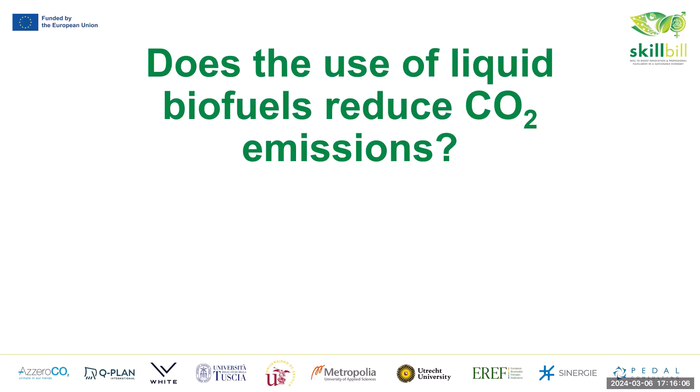The problem is more multidimensional and complex. So it's not only the primary emissions coming out from the tailpipe, but to get reliable answers, one needs to carry out life cycle assessments, environmental impact assessments, and such kind of calculations that take the bigger picture into account. So there aren't easy yes or no answers.

This table I took from one of the course materials, and it's quite a recent publication from early this year. And one advice is that if you want to understand it in depth, of course you would take a look at the original reference or the original publications where these conclusions or small details have been taken.

However, this is based on LCA, life cycle assessment calculations and evaluations, and bioethanol, biodiesel, biomass to liquid, biomethane, and also hydrogen results have been collected in this particular table. And what I wanted to visualize and emphasize with this material is that basically

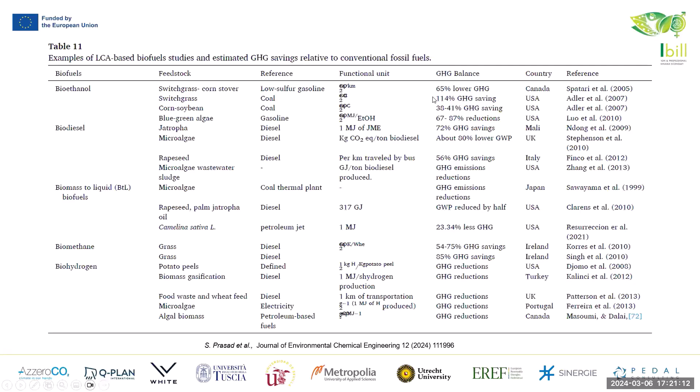But generally, first generation biofuels can also result, as mentioned in this slide, in lower greenhouse gas emissions, but with this, I want to just highlight that sustainability is much more than just greenhouse gas emissions and much more than only carbon dioxide emissions.

The advantage of these first generation biofuels is clearly that these are usually established and quite simple processes, and they don't require intensive pre-treatment of the biomass material. So these are quite easy to make. If we talk about bioethanol, it has been made from sugars, from edible materials, for thousands of years. We have made alcohol, ethanol beverages and so on, and the process is quite well understood and works well.

But the challenge here is to leave these edible materials to humans and animals and try to move more towards non-edible materials as the biomass source. We'll tackle this more in the waste to fuels course, but there are also biomass components that are not edible, like parts of the plant that usually are not eaten, like the peel or the stem or some roots or branches of that plant.

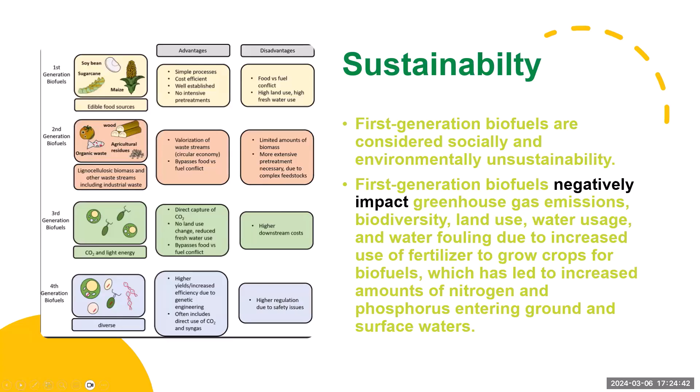In addition to woody biomass, different residues, leftover parts, organic waste and such kind of materials are considered to be more sustainable and better alternatives. Here's a similar first, second, third generation categorization, just from a different source, a different publication. Second generation raw materials are specified here as lignocellulosic biomass.

Next time we'll take a look at the chemical composition and also the molecular structures of different biomass types and their potential in biofuel production. Typically it's bioethanol and, as mentioned here, gasification, pyrolysis and such types of activities that are in the second generation biofuel category.

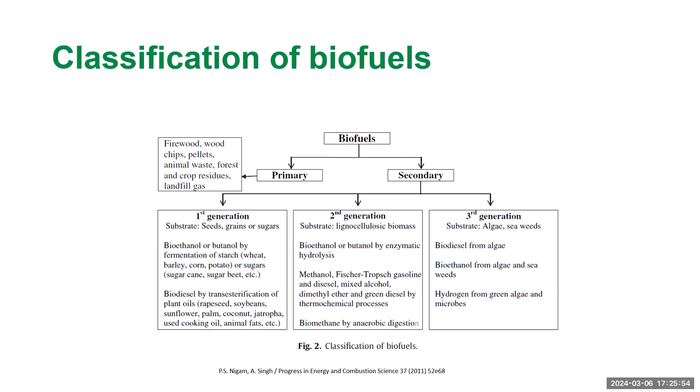Here are the different life cycle steps. There is the biomass plantation or growth and the harvesting, and the emissions and energy consumption related to that. There can be a lot of transportation from one place to another. It can be spreading fertilizers and seeds on the fields, for example, or transporting the crops to a certain processing facility that might not be the same place where the actual biofuel is made.

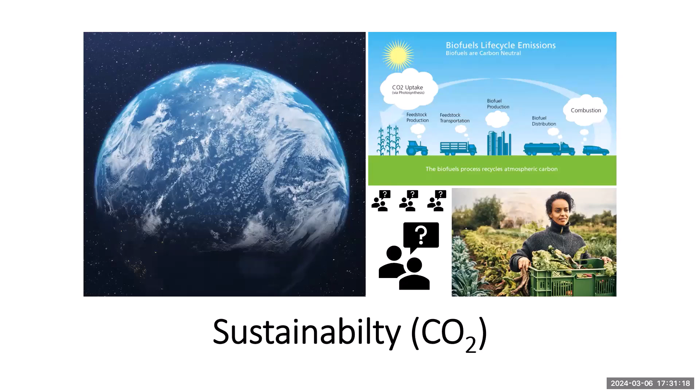When dealing with plant material, very often you need certain types of fertilizers and things. Those are often not coming locally, but can be made on the other side of the planet and so on. So if you start to take all these effects into account, it's not always self-evident which biofuel or which process is the most sustainable one, and it becomes quite complicated.

What is, or what should be, quite clear is that biofuels offer reduction in greenhouse gas emissions and help to substitute or replace some of the fossil feedstocks used in fuel production. That is the starting point, mentioned already a few times today.

There are these sustainability concerns related to, for example, particularly these first generation biofuels, so competition with food production. There is still lack of food and malnutrition on the planet. In quite many places, there is much more need for food and nutrition than for fuels. And then it's a question: will it happen at the expense of food production? Will the fields and land be used for making fuel ingredients instead of making food?

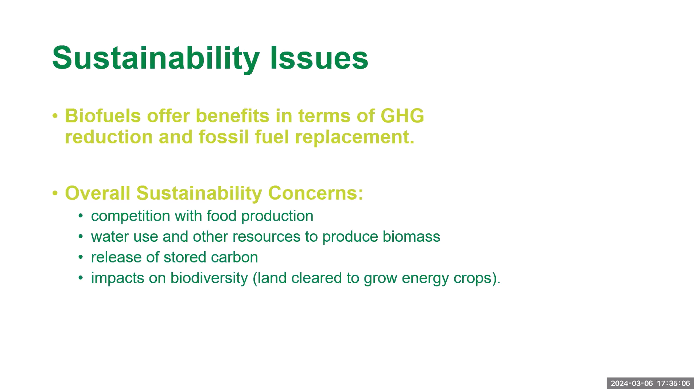There are quite bad examples, at least in South America, related to this: the Amazonian rainforests are decreasing very rapidly because of, for example, farming, meat production, and growing of these different biofuel components. So sustainability takes into account different aspects, or at least it tries to.

Often, like in this case here, intensive modern farming or intensive modern production methods tend to have negative effects because they aim for very high productivity, very high efficiency. So it often results in adverse effects, and that can cause, for example, soil erosion and lack of water, if there's too much irrigation needed, or all the groundwater resources are run dry.

Very often these plants grow faster in the absence of pests and insects and things like that. Those are handled often with pesticides, which cause pollution in the environment. This was already mentioned, but plant growth is much higher when one uses phosphorus and nitrogen-based fertilizers, and usually when water-soluble fertilizers are combined with irrigation and soil erosion, you end up spreading those nutrients further than just the field area where you grow the crops. That causes eutrophication in nearby water bodies like rivers, streams, lakes, and eventually the sea as well.

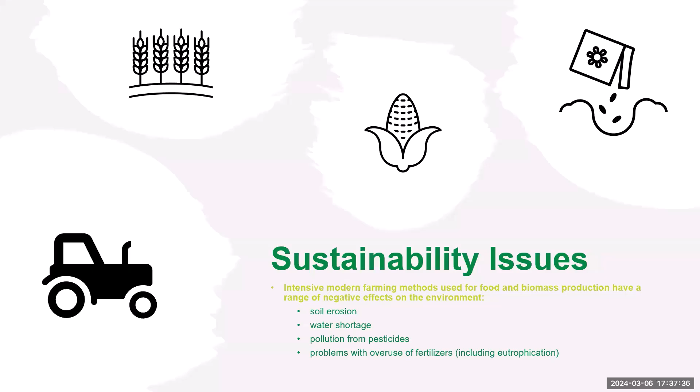I don't know if you have been following this palm oil discussion. It was quite active some 10-15 years ago here in Finland, because we have one of the world leaders, Neste. It's an originally Finnish company that makes hydrotreated vegetable oil, HVO diesel, that is very high quality, and the key raw material used to be palm oil. Like it says here, it's one of the cheapest sources of vegetable oil, and it's quite widely used in the food industry, making of cosmetics, and also making of these fuel components or renewable diesel.

And the palm oil, at least, I'm not an expert in that sense, but it's, for example, grown somewhere in Malaysia, and because there used to be very high demand, of course the locals tried to increase the farming area for these palms and the making of that oil, and it was at the expense of local forests and local farmers and so on, and caused problems. And this

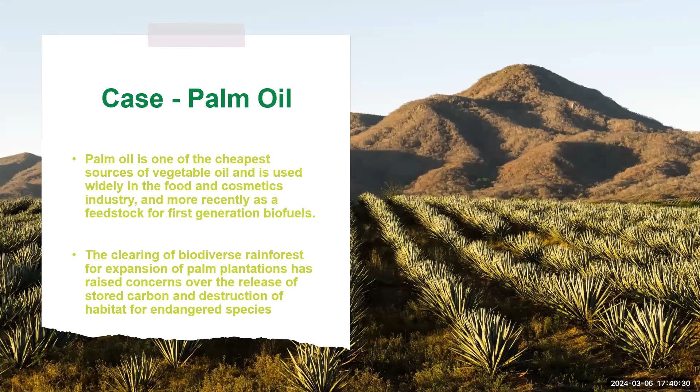Land use changes, so this was mentioned already slightly earlier, but it can result, like once the land is used for growing energy crops instead of food crops, it can influence the local farmers, it can influence the local conditions quite a lot, and this raises some concern.

And also often, if the farming land is taken from local forests and the trees are cut down, or rainforests or otherwise the local habitats for animals and plants, this is nowadays quite a big concern, the reduced biodiversity. So often the modern methods that we use for efficiently making our food or our fuel ingredients mean that the farming is not taking the other plants, other animals much into account. But that's probably something that you have heard quite many times already.

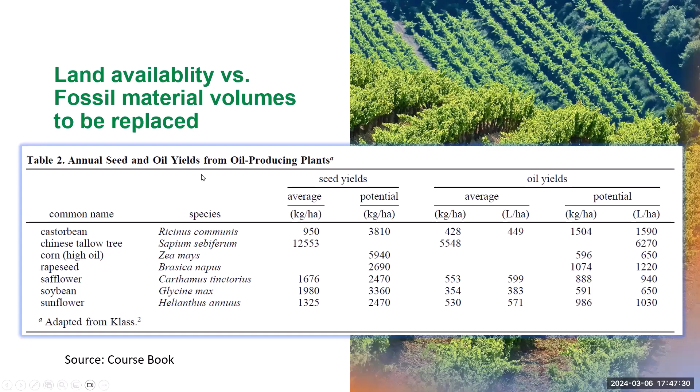This food versus fuel we addressed to some extent already, but it's not that easy maybe to answer that. And now that we are in the global world, it's not always visible to us where the fuel comes from. It can be that it's made out of seeds and oil in Malaysia or some parts of Africa or Australia where you have never been, so it's not visible to you. Also the production and processing can take place in other countries, so it's not easy to see.

But the question is how to prioritize. Do we need in Europe, when we don't usually have malnutrition and lack of food, is it correct that we use the food from other countries and they suffer perhaps from malnutrition? Well, you'll understand probably the point here.

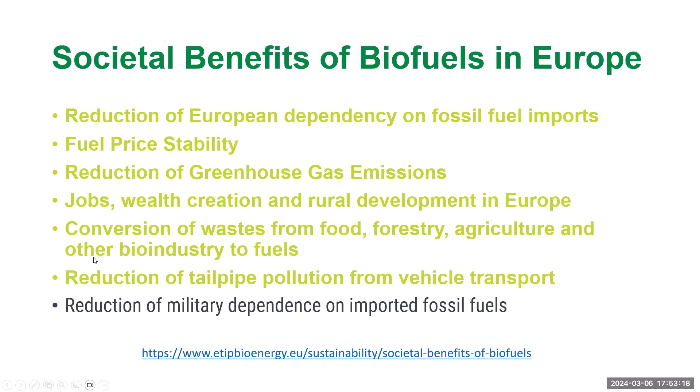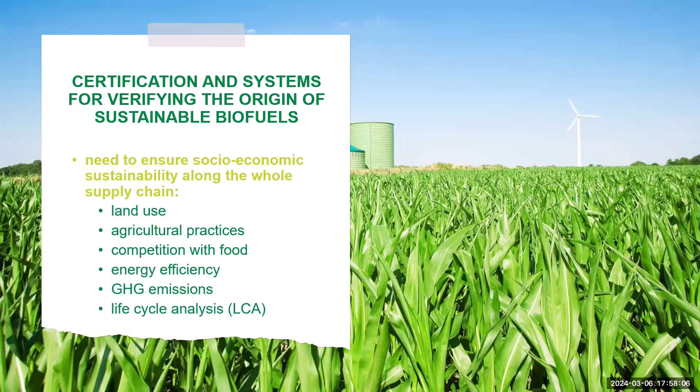And very often some alternatives are good for certain things and the other alternatives do better different things. So it's not always easy to decide what is the most sustainable way of doing these things. So we can continue with today's theory. And next I'll present some applications related to these biofuels.

And first of all, methanol. That was presented last time as one of the fuel alcohols that are produced in quite large amounts. It's one of the largest volume produced chemicals in the world. At least it's in the top 5 of most produced chemicals. And methanol has many uses in addition to fuel use, for making certain basic chemicals like formaldehyde and acetic acid and so on.

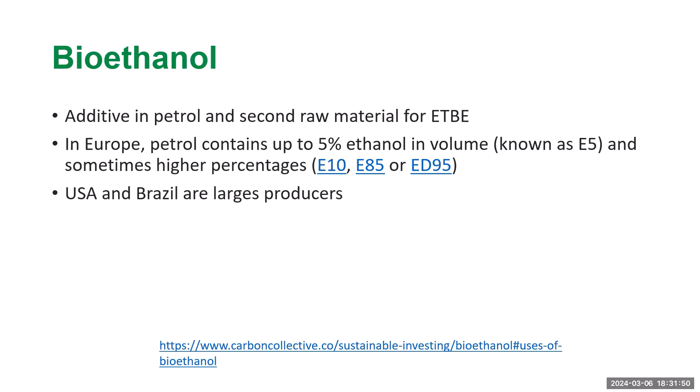This was mentioned last time as a biofuel, but like ethanol and methanol, ethyl tert-butyl ether is an additive or blending agent, so it's not usually used 100% pure, but it's added into fuel in order to improve the combustion. It brings oxygen. It's an ether. Ethers contain oxygen, so it increases the oxygen in the combustion process.

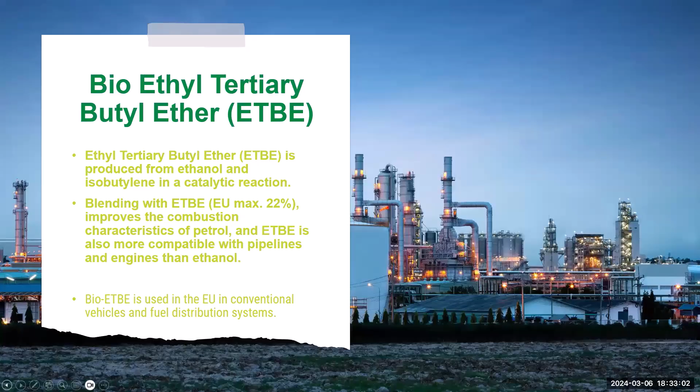But I guess that's the application side of it. The main application is to be blended in petrol or gasoline, depending on whether you prefer American or British English.

I tried to search for some applications for butanol. That's an even longer chain alcohol, containing 4 carbon atoms, and it resembles the hydrocarbons used in petrol more because it has the longer hydrocarbon chain. We'll take a look at these structures later, perhaps.

But butanol is closer to gasoline than, for example, ethanol or methanol, and therefore it can be used blended in gasoline so that it's the main component. So 85% butanol, 15% gasoline can be used in regular petrol engines.

This slide you already saw last time, but otherwise I tried to look for material related to butanol and its use and production volumes, and I couldn't easily find it, so I don't really have numbers. I came across that there are certain standards for butanol isomers in the United States related to fuel applications, but I don't know how the situation is in Europe at the moment. Something that should be studied maybe more in depth. But the economic importance of this is clearly less than for ethanol and methanol and these ETBE additives.

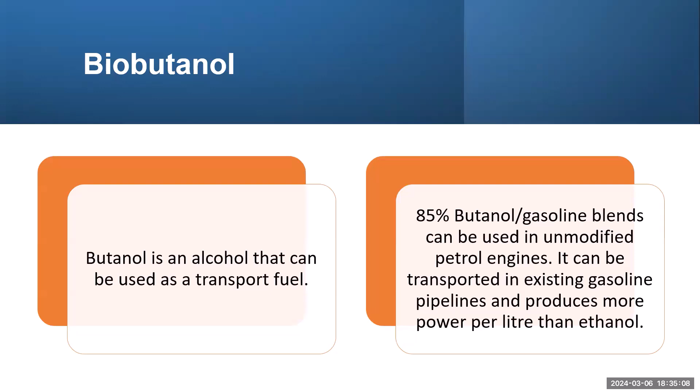Then the fourth biocomponent of biofuel is this FAME biodiesel, so the traditional first generation biofuel made out of edible oils, or it can also be waste vegetable oils. But this is something that is again used as a biocomponent or blending agent. So seldom is this used as such, because in modern diesel engines it requires modification.

It's not very high quality fuel, 100% pure FAME, but it works reasonably well if the concentration of this component is kept rather low. EU has set the limit to 7% by volume for this fatty acid methyl ester component or additive in the diesel. But otherwise, I don't see any reasonable use for this. So it's used as a biocomponent, and that's where the main larger volumes are going with this particular fuel.

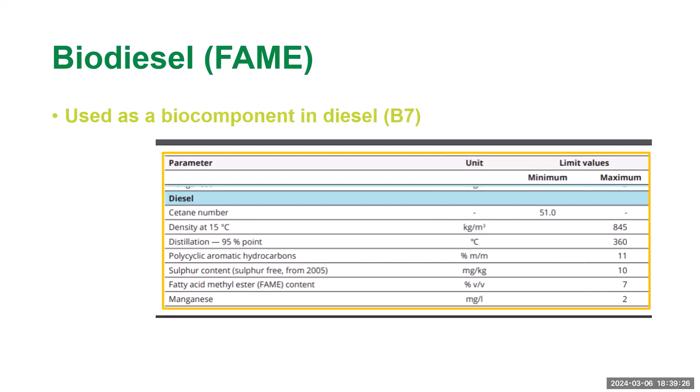And the good thing with this is that it's comparable to fossil-based diesel fuel, or it can be even better in terms of quality. So it's not any compromise to use this. This can be used pure, so it doesn't have the blending problem like FAME. FAME was usually exclusively used as a blending agent and in minor quantities, but this doesn't have that problem.

Neste is making this HVO from, previously they used palm oil, and like mentioned today, they want to reduce the amount of palm oil and use alternative sources. So they use all sorts of fats and oils coming from slaughterhouses, from the alimentary industry, waste oils, whatever is a side product or waste product. So they have technology to convert that into this particular product.

And UPM is traditionally a pulp and paper industry. So they have developed a technically similar process, but they use, now I'm trying to figure out the name of it, it's wood-based, it's tall oil. So from pulp and paper processes you have a side product called tall oil, and that can be converted with this technology to renewable diesel.

There are certainly other manufacturers that make similar HVO grade diesel products from different renewable starting materials. So these are not the only two. But the application is of course like in the picture, so it suits very well for passenger cars, but like we discussed earlier, it's difficult to replace heavy traffic, so trucks and heavy machinery, with anything other than liquid fuels. So here it's a very nice alternative that this type of renewable diesel is available for trucks and for goods transportation.

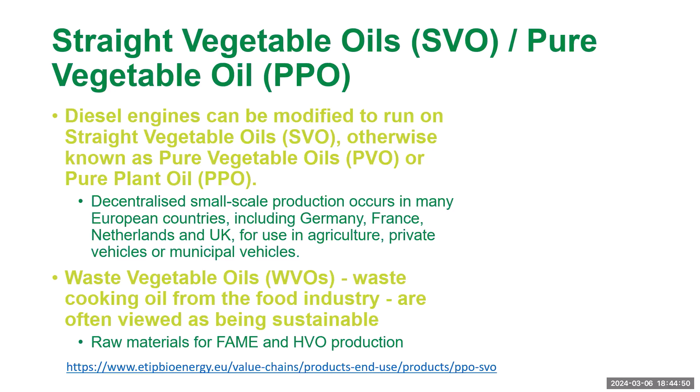Then, of course, if you utilize these waste vegetable oils, it's not then considered as first generation fuel. For example, this HVO production that I showed is a large scale commercial operation and production facilities, and of course Neste and UPM and other HVO producers are hunting for these waste oils, waste vegetable fats, and such kind of things that they can utilize in their processes. So I think it's a niche application, but just good to know that.

Then we still had a few types of fuels to go through regarding their application: Fischer-Tropsch liquids or biomass to liquids. We glanced through that on Monday already, and I have to say that this technology can make petrol components, diesel components, so different types of hydrocarbons. It will become biofuel if the starting material is biomass, but Fischer-Tropsch production traditionally uses either coal, a solid carbon source a bit similar to biomass, or gases like natural gas, or it could use biogas in principle.

So depending on which source of carbon it's using, it can be called coal to liquid or gas to liquid, and the gas has been natural gas, but there is no limitation. It could also be biogas. And I remember these examples already from 20 years back. And again, I tried to search for biomass to liquid production facilities, and I couldn't find those at the moment.

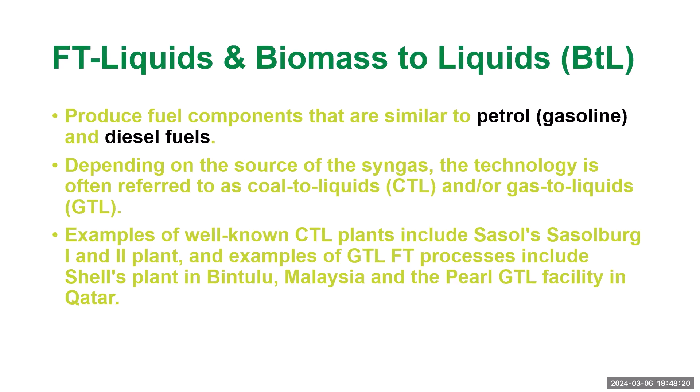Then the second last category of fuel components is synthetic hydrocarbons. Keep in mind that this is the latest addition to the wide spectrum of products and processes, and at least I haven't heard that there would be any commercial products available. There are research and development projects around these technologies, and some pilot projects. For example, in Finland, it was recently in the news several times that the state technology development company VTT was running a pilot project where they used captured carbon dioxide and electrolyzed water-based hydrogen as starting materials to make synthetic hydrocarbons.

The applications would clearly be these so-called drop-in fuels. One can tailor and fine-tune the production so that you can make similar hydrocarbons to those you find in diesel, petrol or gasoline, kerosene, or these common hydrocarbon fuels that are used today.

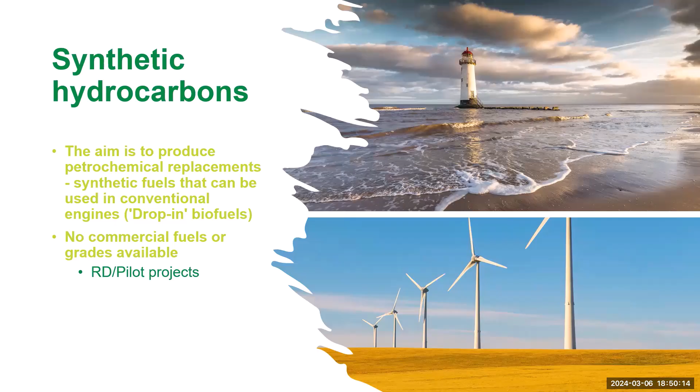The last, if I remember correctly, is the so-called bio oil that we didn't discuss much on Monday, but it's made through pyrolysis. It's basically breaking the biomass in the absence of oxygen at higher temperatures, so that the biomass polymeric matrices and chains break into shorter chain hydrocarbons. And the bio oil, or pyrolysis oil, is quite a complicated mixture. I just copied a composition from one of the textbooks that I used.

So there's plenty of water dissolved in it. The reason why water likes to be in pyrolysis oil is that there are these aldehydes, ketones, acids, alcohols and such, which are partially water soluble.

So water can easily dissolve slightly into this pyrolysis oil. Also chemically, it's a mixture of quite many types of molecules, which are not all very good fuel components. So this is a mixture of this and that.

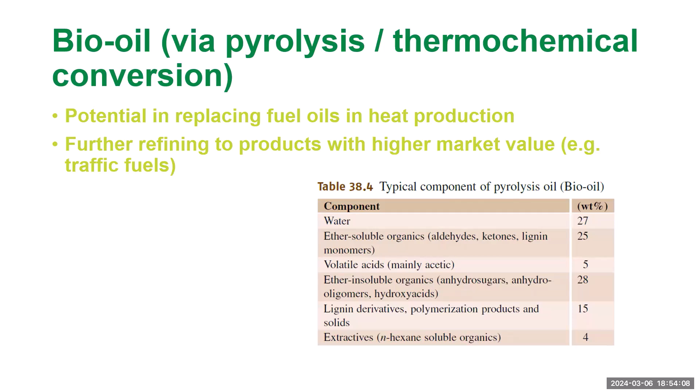So this is not an exhaustive or complete collection of benefits, disadvantages and properties, but a few highlights regarding biofuel properties, some which are beneficial, some that are not so good. Keep in mind that we already mentioned there are different standards.

Typically fuels that are used commercially have certain standards and quality requirements. The idea is that the commercially sold fuels fulfill those criteria, so that vehicles all around the world or throughout Europe can use the same fuels without worrying that the engine will break or some other problems will emerge. But I will not go through these standards. These are just certain different level benefits and disadvantages.

In Europe, we have our own standards. There are also North American standards, and these European and North American standards are quite similar in terms of content. Some other countries have also developed their own standards, but at least some 10-20 years ago, quite many countries were just adopting the American or European standards for their own production or their local conditions.

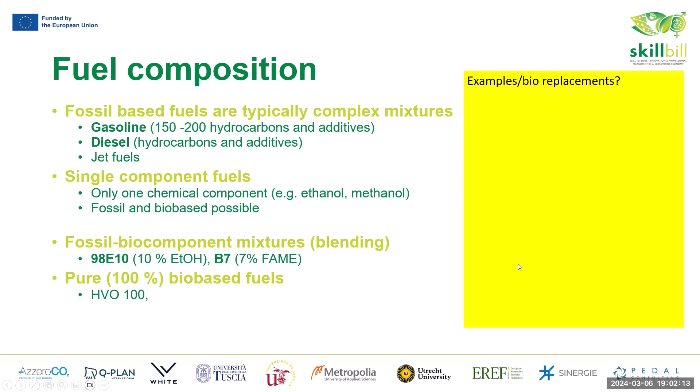This we have already glanced through, but just thinking about the fuel benefits and disadvantages, there are quite many dimensions here. It can be related to availability or economy, and clearly there are these environmental greenhouse gas emission aspects and so on, but also the availability of the starting material and sustainability of the production chain, production process. Technology-wise, some starting materials are more challenging, more demanding, also more costly.

And then there is the policy part. So there's a lot of legislation, regulations, standards, and things that you have to take into consideration, and it's not always that easy.

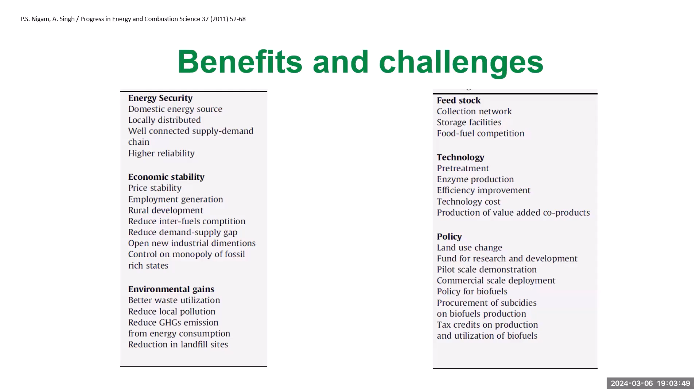One thing with diesel fuel is that it's not like regular petrol; if you store petrol for half a year, it doesn't work. There are components that evaporate and the composition degrades, and it doesn't work so well anymore over longer periods of time. But diesel fuels have very long storage times, they don't degrade so easily. For fossil and renewable diesels, the storage time can be many months and years.

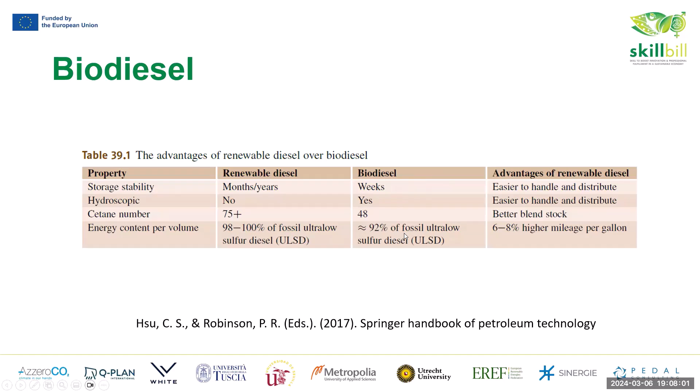Here are then some other properties that were not taken into account. This FAME biodiesel was the lower quality one in this table, but it has potential. It can be made from, let's say, waste materials, not only from edible oils, but recycled fats, recycled grease, animal fats, waste oils, and such kinds of things.

To some extent it's non-toxic and biodegradable. Being biodegradable can also be a disadvantage, as discussed just a while ago. But on the other hand, if you get spills into the environment, it disappears quite quickly over time and doesn't cause the pollution problem that fossil or renewable diesel would.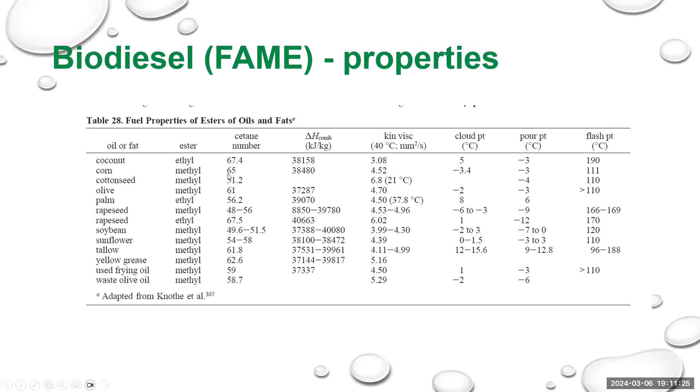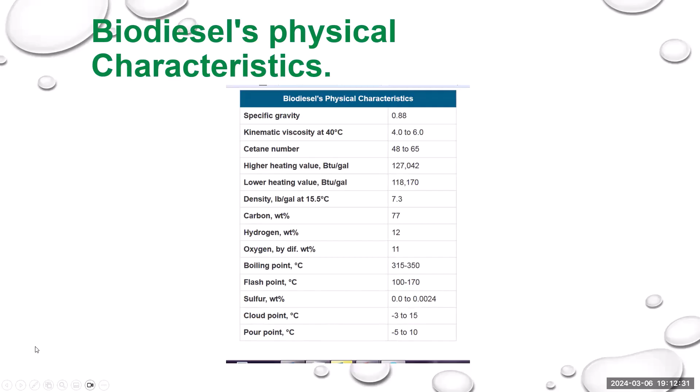Here are some other characteristics of biodiesel. I don't know if some of it would be worthwhile to comment. Sulfur content is quite low. Maybe that is something that, like fossil or crude oil contains quite a lot of sulfur, and it's an extra step in the production process to remove that. But some, like these vegetable oils, are by nature low in sulfur content, which of course improves the SOx, sulfur oxide emissions, without any purification steps.

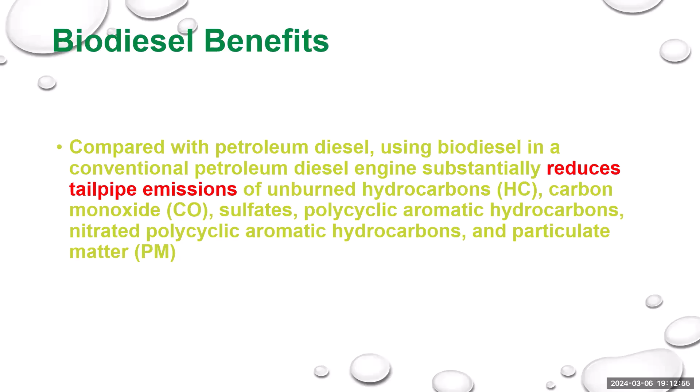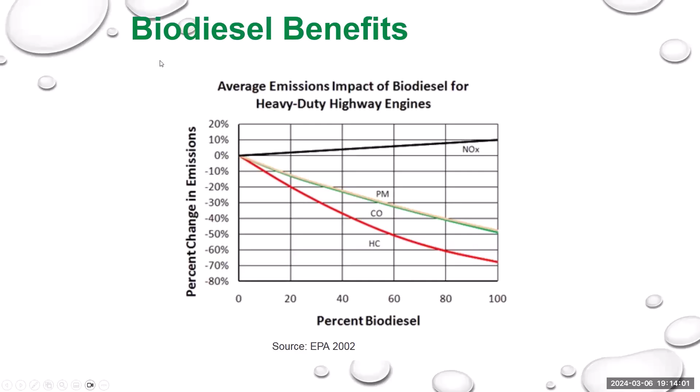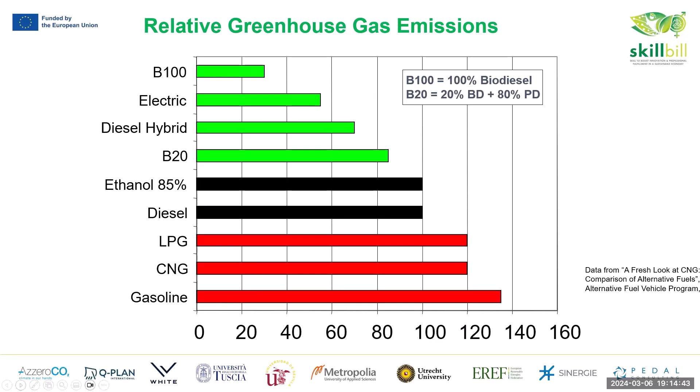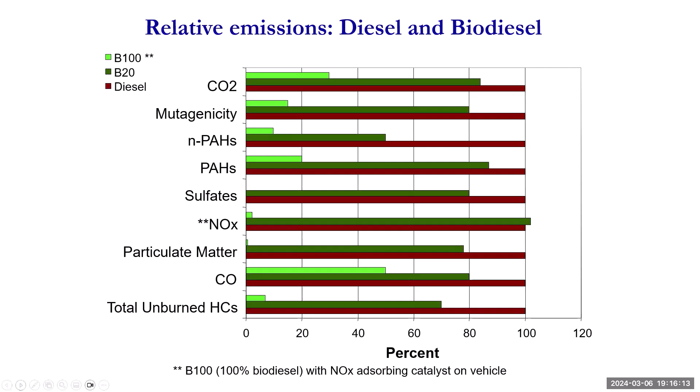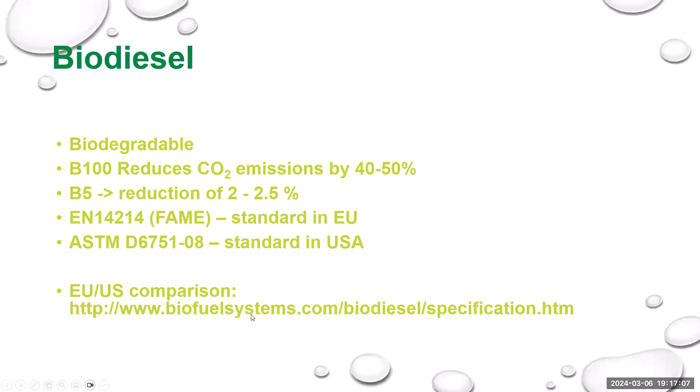I think we covered these things already so I don't need to repeat. It's maybe the same thing. Here are these standard numbers, standard in EU. So it usually starts with EN, and the American one is ASTM, and then some standard number. So from that you'll identify the EU or American made standards for different things.

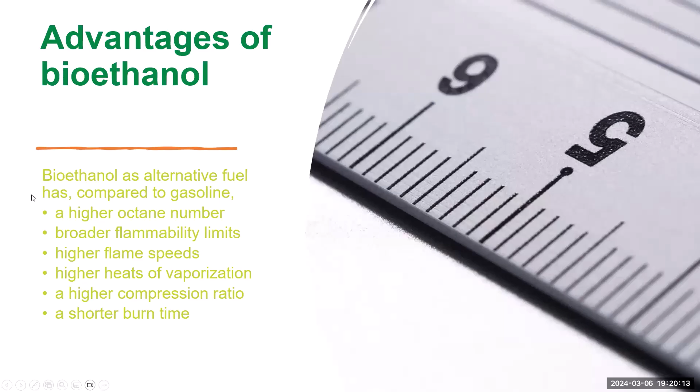I took this from an article, and in connection to the same, there are these disadvantages of bioethanol. On one hand, it has slightly lower energy density compared to gasoline or petrol. So if you put 1 liter of ethanol or 1 liter of gasoline into the car's tank, you run longer, you have higher mileage with the gasoline; ethanol will not take you so far. So in practice, same volume but lower mileage.

How much different? I think it's written somewhere in the course book. I would say some 15% lower or something like that. That could be okay. 15-20% lower energy density.

Then bioethanol is corrosive, and that's maybe something that comes as a surprise if you think about alcoholic beverages, ethanol being the ingredient, that it would corrode. It's not corroding in a similar way as acids like sulfuric acid or hydrochloric acid or something that is highly corrosive, but it is more corrosive than the normal hydrocarbons used in fossil-based petrol.

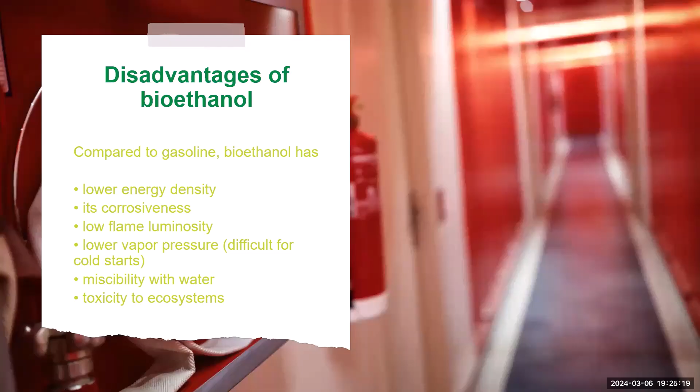This is, I would say, toxicity to ecosystems. If you compare to gasoline or diesel, I'm not aware that ethanol would be any worse in terms of toxicity, but of course it's not something that you are supposed to pour into nature.

Sorry, I have a question. I think you said it before, but how is bioethanol produced? Sorry, did I hear that? How is bioethanol produced?

There are basically two routes or processes. One is the traditional fermentation of sugar-containing starting material. You squeeze the sugars out from sugar-producing plants, so sugar cane, beet, well, now I don't get the English word for it. But in any case, if you make regular table sugar or glucose, you need that and water and some baker's yeast, and you ferment it in a very similar way as alcoholic beverages are made. So it can be made from sugar-containing materials, or from grain, by fermentation.

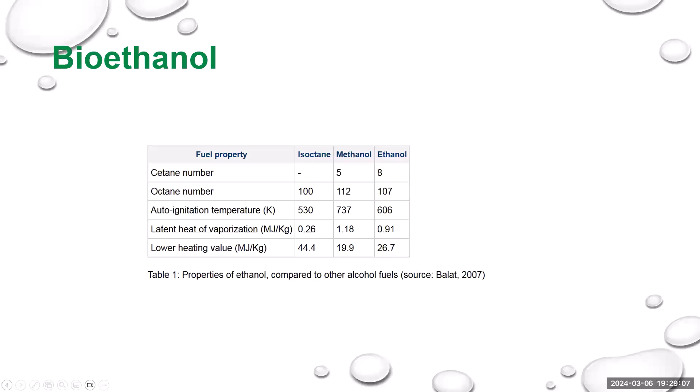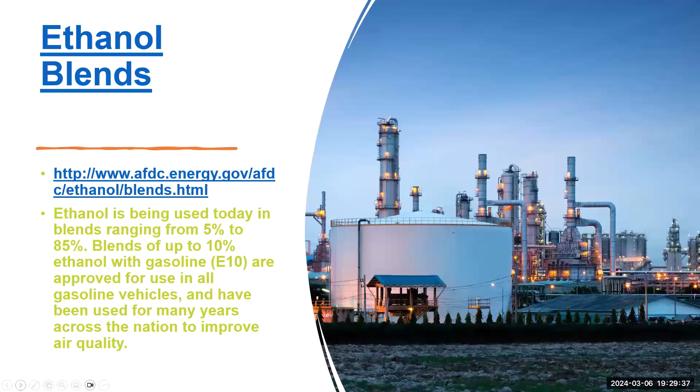I have some overlap in the materials. I think this blending is quite clear already. Ethanol is used a lot as a blending agent or bioadditive, and I will not focus on these more.

Okay, this is more or less the last slide. This is something that I took from, I think, last week's slides as well. So now that we have, to some extent, gone through different biofuel alternatives, and some things about their sustainability, their properties and also applications, it's good to remember that here five properties are listed, but for which fuel is used and what is maybe the best, there are lots of things that play a role. These are just a few important ones.

There's transporting the fuel: how easy or how difficult it is to transport. Very often liquid fuels, materials that are liquid at more or less room temperature or regular environmental temperatures, are the easiest to transport. Liquids are also easiest to store. Gaseous materials require very tight, often pressurized tanks to keep them there. But for liquids, you need a very simple canister or container, and they can be safely stored.

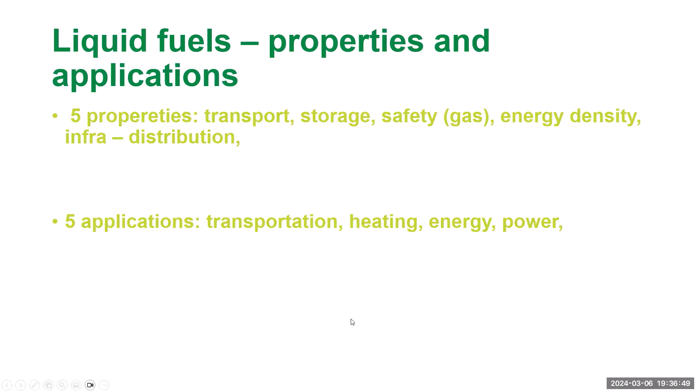I think that was probably all for today. So in short, we addressed the sustainability pluses and minuses related to biofuels, went through a few applications for these biofuels, and also went through some of their properties and the pluses and minuses related to their use, and that's, I think, all for today.